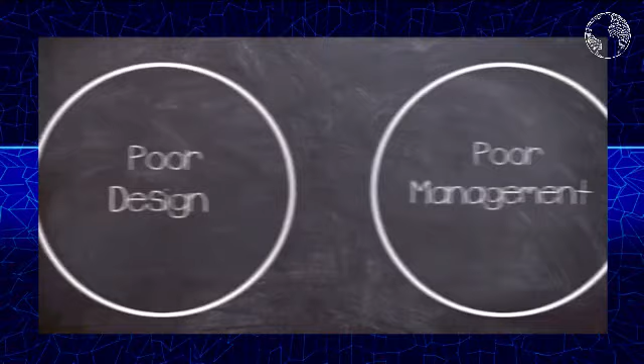most of Eastern Europe. Of course, today we're looking at the Chernobyl disaster of 1986, and this one has earned the magical 10 on my patented Plainly Difficult disaster scale.

Believe it or not, this video is actually part of a series of videos on the Chernobyl disaster and, in a wider context, the RBMK reactor type.

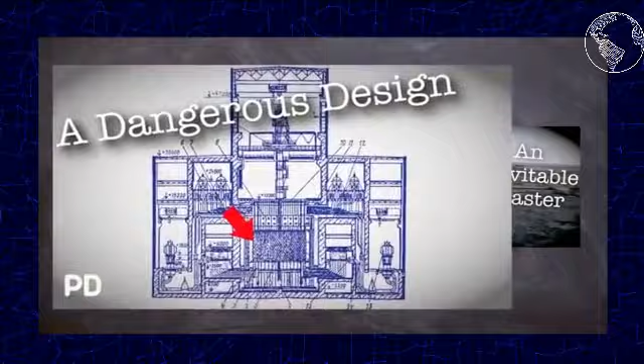Ah, you're back. Welcome. Yep, I know it was a bit of an overdone trope.

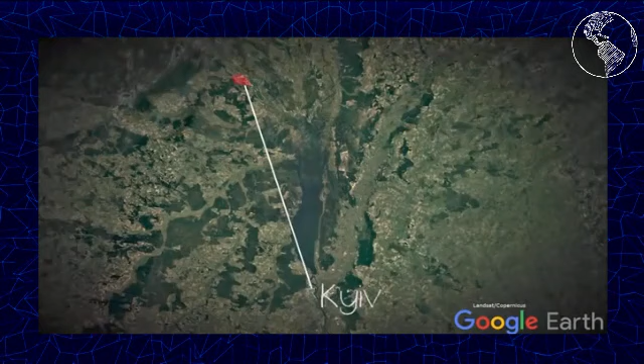So let's get back to the main reason why you're here. Our story starts back in 1970 in Ukraine, about 100 kilometres, 62 miles from Kiev, when ground was broken for a new city that would become known as Pripyat, an Atomgrad designed to house the workers for

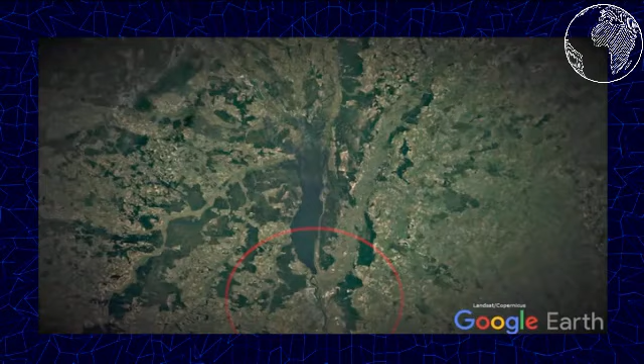a new nuclear plant. It should be said that the original plans were to build the city and the plant just 25 kilometres, or 16 miles, from Kiev, but it was thought to be too close to a major city, which turned out to be a good decision.

The concept of an Atomgrad is similar to, say, Tomsk, which were closed cities, although Pripyat was open later on in its short lifetime as a city. These municipalities were designed to be self-contained communities that had a sole purpose, and that was keeping the power plant

working and, by extension, the workers that were employed there happy. The community at Pripyat was developed to be the perfect home for a young family, with its amusement park and modern, at the time, architecture. In the same year, the ground where the new plant would exist was prepared for construction.

The Chernobyl nuclear power plant began construction proper in 1972 after the central government decided on what type of reactors the site would house. Originally, the idea for a pressurised water reactor was thought to suit the new plant, but

it was overruled by Anatoly Alexandrov, the chief scientist who was at the time supervisor of the project of RBMK reactor plants. The reactor type was preferred due to the design being cheaper to produce, and

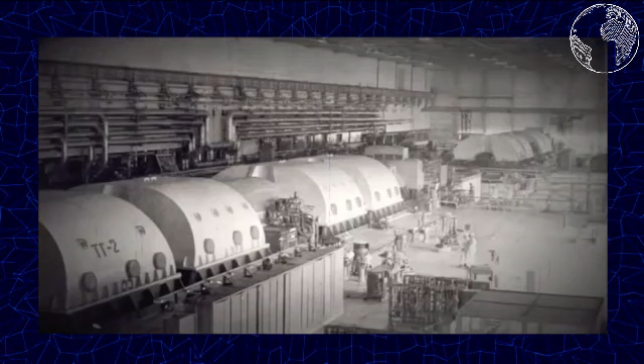as we found out with Leningrad, that cost was a pretty high priority, some might say even over safety. The nuclear power plant had the first of its 4 reactors ready to operate in 1977, followed by number 2 in 1978. As a quick side note, units 1 and 2 were the first generation RBMK 1000 reactors, and because

of this they had slightly different core loadings and containment structures. But the remaining 2 reactors at Chernobyl were of a slightly more modern second generation, and they were named units 3 and 4, which went online in 1981 and 1983 respectively.

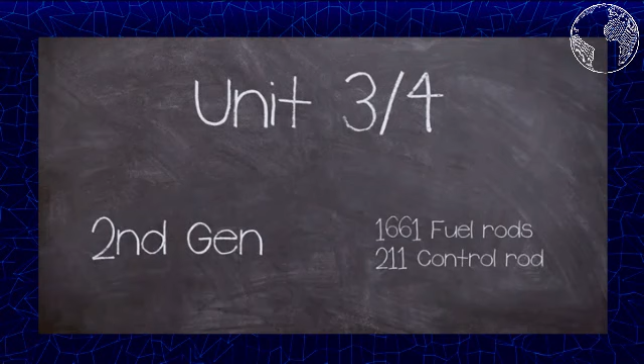There were plans for another 2 units, but these were abandoned after 1988 when risks of contamination left the project untenable. The nameplate capacity of Chernobyl nuclear power plant was Unit 1 at 800 megawatts of electricity, Unit 2 at

1000 megawatts of electricity, Unit 3 also had 1000 megawatts of electricity, and the same with Unit 4. In this video, I'll be focusing on the second generation RBMK, its design, and more specifically Unit 4.

But I did look into the first generation in the Leningrad video. The RBMK was a bit of a unique design in the reactor world, but it was a product of evolution rather than revolution, in that it used graphite to moderate the chain reaction with light water as a coolant.

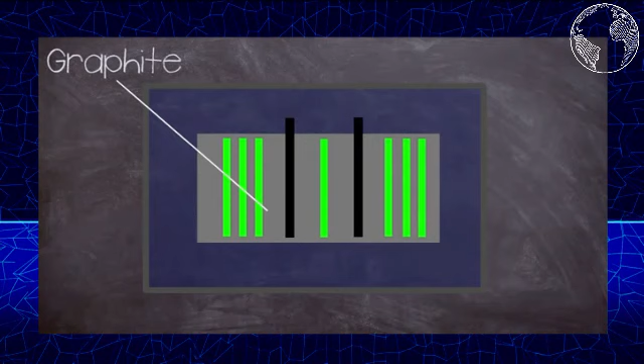This combination allowed it to use lower enrichment uranium-235 for fuel, which is not surprisingly significantly cheaper than other reactor designs. The RBMK had a very large core region consisting of a height of 7 metres and a diameter of

11.8 metres, which was mounted in a steel cylinder that was placed on top of a biological shield. The steel cylinder was 16 millimetres thick and had a diameter of 14.52 metres by a height of 9.75 metres,

dug into the floor of the reactor building, inside a reinforced concrete lined pit. Between the steel wall and the concrete lining, a water tank was placed, followed by a sand packing.

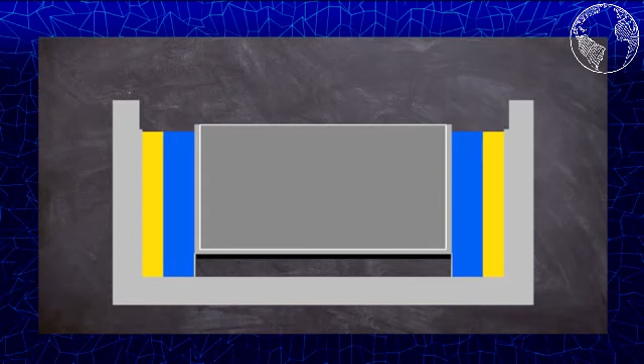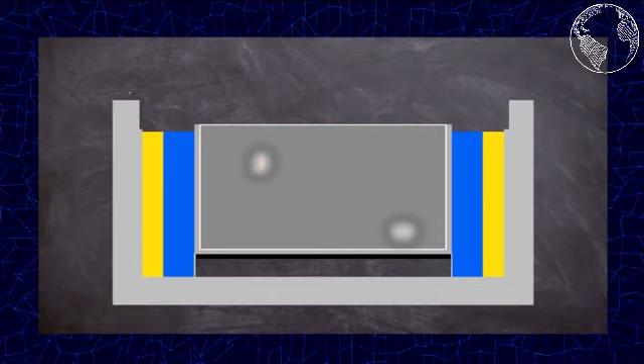Below the bottom biological shield, there were several basements used for pipework for the reactor core cooling loops. The core consisted of graphite blocks sized 25 by 25 centimeters, stacked up with holes drilled through the center for fuel and control channels. The size of the core could cause issues in reactivity control during operation, but we will talk about that a bit later on.

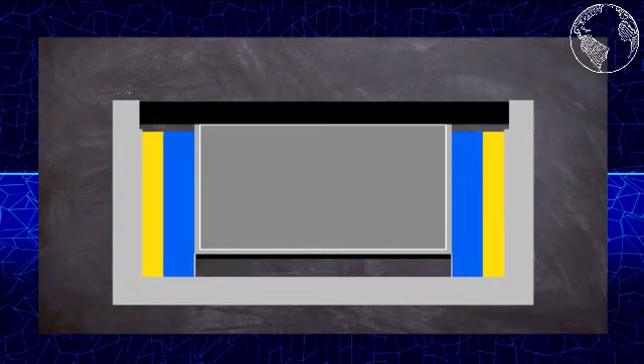On top of the core, another biological shield was placed with a steel cover on top of it, which formed the floor of the reactor hall. The cover plate was capable of withstanding a pressure build-up resulting from steam released by two simultaneous channel ruptures. All of this allowed the design to be refueled whilst in operation, which again helped with costs by reducing downtime.

As a side effect of this, the confinement structure of RBMK reactors is less than ideal, as the tall refueling machine had to be housed inside the reactor hall. Because of the large floor space and subsequent roof requirements, the vast quantities of heavy concrete wouldn't have been architecturally, or more importantly, financially viable.

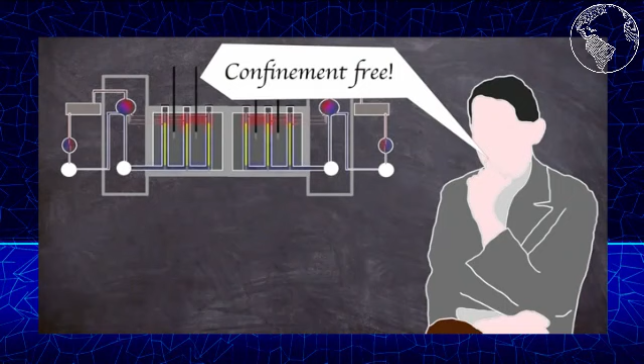The RBMK didn't have a prototype and was instead put straight into production, with the first reactor being installed in Leningrad in 1970. The original designs omitted confinement, instead claiming that the fuel being in its own channel with flowing cooling water was an acceptable alternative. The main takeaway from this is confinement was poor, resulting in disastrous results in the case of fission product release.

The coolant was pumped through the core, from the bottom common header through high pressure tubes that jacketed the fuel elements, where the water would boil. Coolant water also circulated in the control rod channels. The primary cooling of the reactor was via two separate cooling circuits, one for each half of the core, meaning everything was doubled up, leading to four main circulating pumps, which were 3 operating and 1 standby per loop.

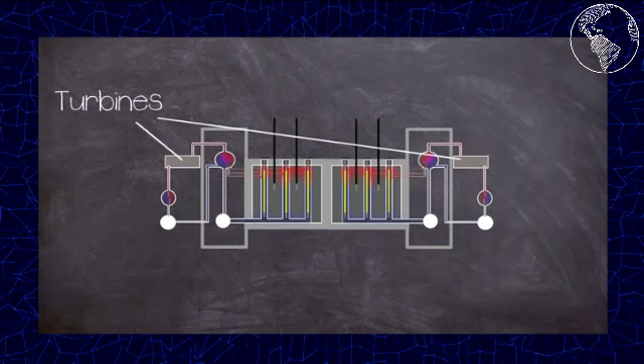As the coolant boils, it exits the top of the core and is passed through a water steam separator, which takes the steam to high then low pressure turbines which generate the electricity. The steam is then passed through a condenser that turns it back into water to be pumped back into the core, completing the primary cooling circuit. The condenser is cooled by using a separate secondary water cooling circuit, meaning the primary cooling circuit is self-contained.

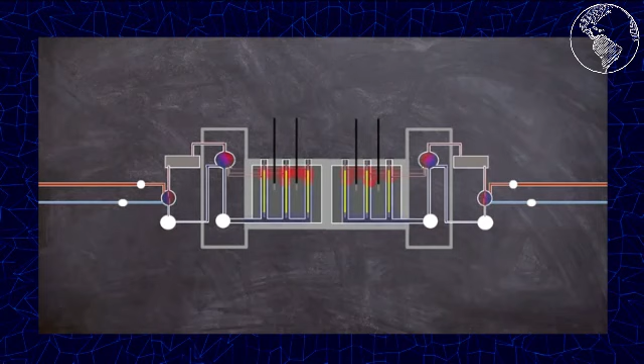As mentioned before, the reactor employed graphite blocks for its moderator. A moderator is used to reduce the speed of fast neutrons released from fission, so they can better facilitate a chain reaction, getting more use out of the fuel. Ideally, moderators work without capturing any neutrons, leaving them as thermal neutrons. But where the design has its potential flaw is having a separate coolant that can also absorb neutrons, which can make the reactor unstable in certain situations.

This brings up the big elephant in the room, and that is void coefficient. It wasn't just the graphite that had moderation characteristics, but the coolant water as well, because H2O naturally slows down and absorbs neutrons. This brings a problem for the reactor, as with the increase in temperature from fission, the coolant boils off into steam, known as voids, i.e. a bubble that does not absorb neutrons. With the steam not absorbing neutrons, this leads to an increase in the power of the reactor.

The RBMK did not rely solely on its coolant for moderation, because that's what the graphite was for, but the water did absorb neutrons, meaning that as it boiled off, the operators had to compensate for this with the control system. If not properly managed, a runaway incident can happen as the coolant heats up, increasing reactivity, heating up the coolant more, creating more steam, leading to greater reactivity. This is called a feedback loop. During this reactor state, more and more neutrons are produced and their density grows exponentially fast, creating a positive void coefficient. The risks of a feedback loop were greater at certain power levels, but this will be covered later on.

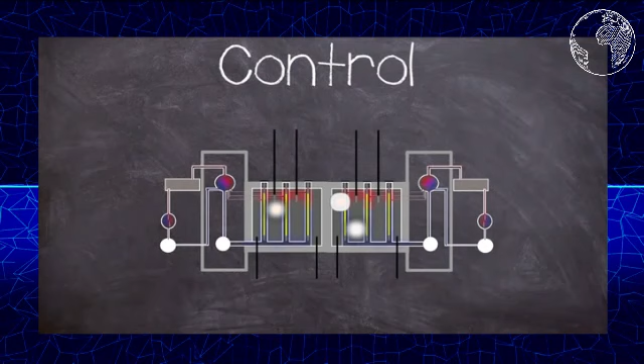Now this leads us quite neatly onto reactor control. As I said before, the core region was rather big, and this meant that the RBMK was kind of like multiple smaller reactors in that hotspots could occur which needed to be individually managed.

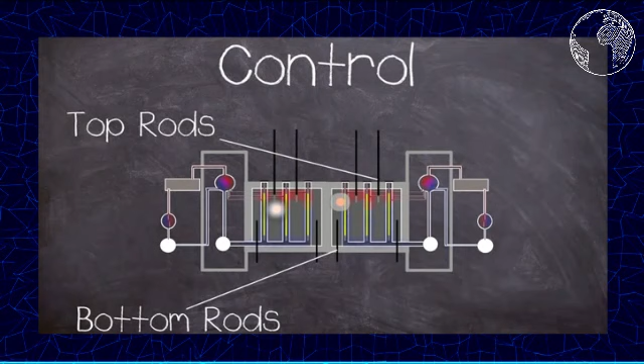And this leads on to the strange design choice for both top-loaded and bottom-loaded control rods. There were 167 top-loaded rods and 32 shortened rods loaded via the bottom, and another 12 automatic controls inserted from the top. The shortened rods were used to manage axial power distribution, which was necessary due to the core size, to manage hotspots.

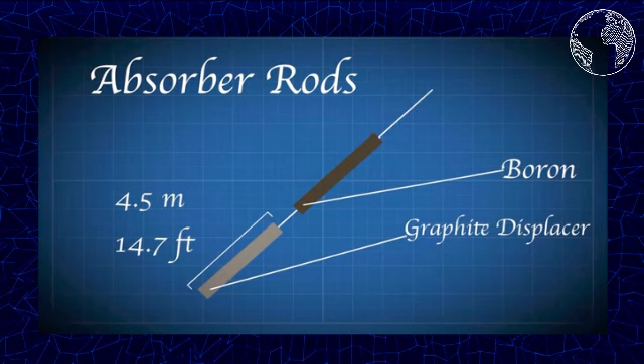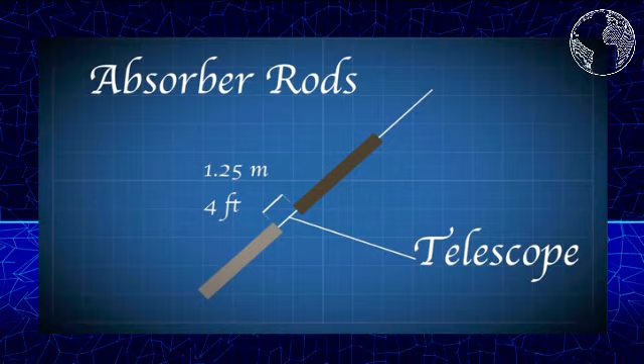The main control rods had a 4.5 metre long graphite rod termed a displacer attached to the end of the length of the control rods, except for the 12 rods used in automatic control. The displacer connected to its rod via a telescope, with a water-filled space of 1.25 metres separating the displacer and absorbing rod.

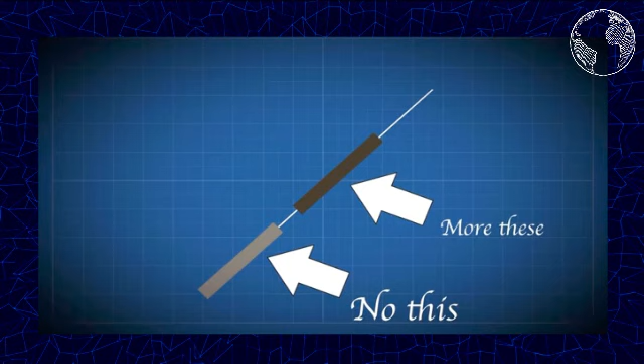This was to stop water filling the space left behind by the control rod after it left the core region, which would parasitically absorb neutrons. Removing one neutron absorber, a boron control rod, to be replaced by another weaker absorber in the form of H2O, kind of defeats the point of a control rod. Thus, without a displacer, more control rods would be needed, as each would have less effect on the reactivity of the core.

The dimensions of the rod and displacer were such that, when the control rod was fully extracted, the displacer sat centrally within the fueled region of the core, with 1.25 metres of water at either end.

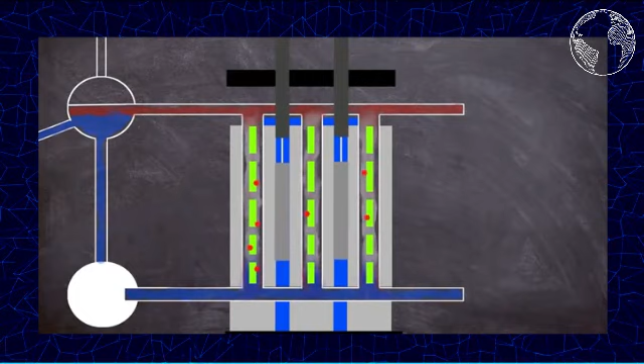But this setup, in certain situations, could cause a positive scram effect. On receipt of a scram signal causing a fully withdrawn rod to fall, water was displaced from the lower part of the channel as the rod moved downwards. This caused a localised insertion of positive reactivity in the lower part of the core.

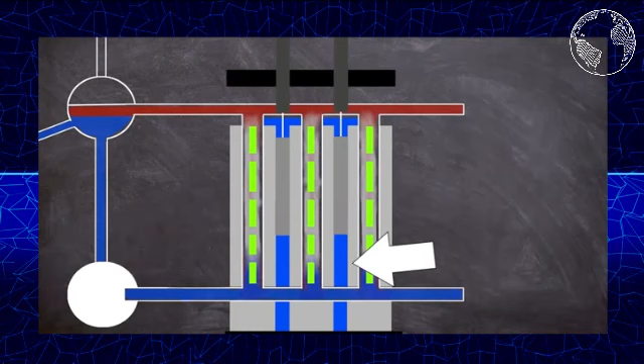This was because the RBMK had a high moderator to fuel ratio, meaning the lower part of the core would experience a spike in reactivity as the graphite displacer entered it, replacing the neutron absorbing water with neutron moderating graphite. But this situation was only dangerous at certain power levels of the reactor, which was meant to be mitigated by the knowledge and training of the operators, and also importantly by their management.

Part of this mitigation was by having an operating reactivity margin. The ORM is the number of equivalent control rods of nominal worth remaining in the core.

The total time required for a scram, or insertion of the emergency control rods into the core, when starting from the upper limit stop switches, was around 18 seconds, which was relatively slow. But this was due to the size of the control rod channels and the fact that the coolant had to be pushed out of the way.

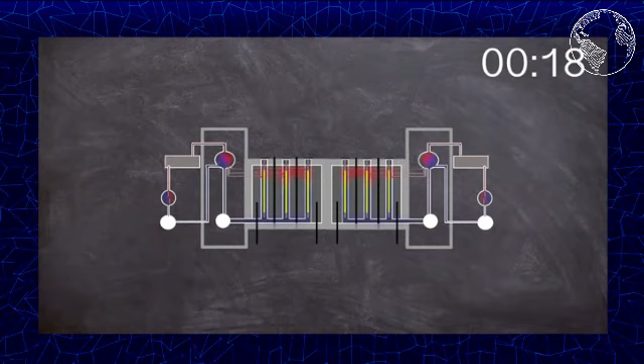The scram could be initiated by the control system or manually via the AZ5 button. The control system employed on the RBMK 1000 utilised ionising chambers and various sensors both inside the core and outside, which were effective from power levels above 10% of total power.

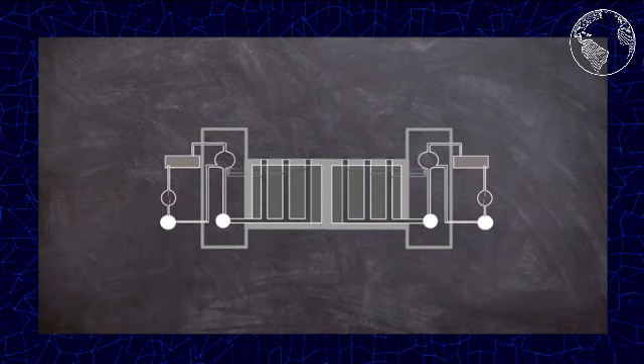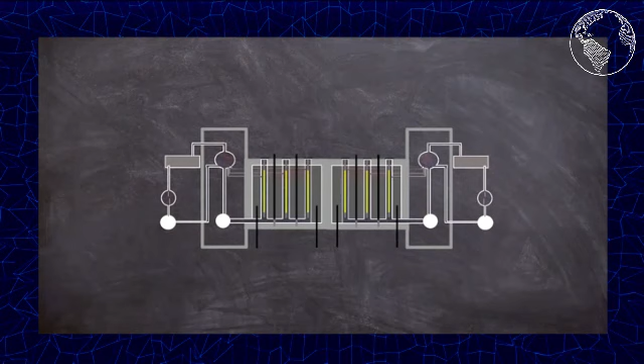The external detectors were all mounted mid-level of the core, meaning no low axial power monitoring could be undertaken. This meant that low power operation below 10% had to be done by operators relying on experience and feel rather than monitoring the equipment. But manual low power control was only really intended for a cold startup, so to speak, when the reactor was free of the neutron absorbing poison xenon-135.

I need to mention neutron poison, as it will play a vital part later on, and was also a contributory factor in another RBMK incident, the meltdown in Leningrad in 1975.

During fission, some products are given off, one of which is xenon-135, which has a high neutron absorption rate. This is okay when the reactor is in a steady state, as it burns off this undesired byproduct, since poison burning is proportional to reactor power.

But when the power of the reactor is decreased, the xenon-135 is not burned off and can shut down the chain reaction by absorbing too many neutrons. This is known as an iodine pit.

All is not lost, as xenon-135 has a relatively short half-life of around 9.2 hours, so a reactor core is considered poison-free after several half-lives have passed.

But this is not good from an economic standpoint, as the unit would be shut down for a few days, which is where good management is meant to come into effect, where safety is prioritised over money. But in the former USSR, taking a reactor out of action for a few days could have a detrimental effect on one's career longevity. Our story starts with an issue inherent to all reactors of any type, a thing called decay heat.

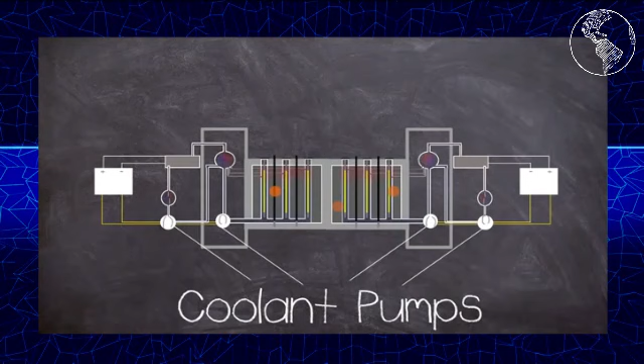And when the reaction stops, this continues, at least for a while after shutdown. During power operation, this is fine as electricity is being produced, but after shutdown, the pumps need to keep circulating to remove the decay heat. Usually the electricity needed for the pumps can be drawn from the national grid. But what about if there is a full power outage? Then backup is needed. This presents a problem.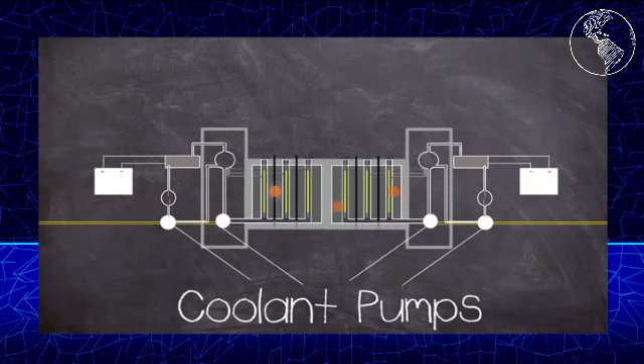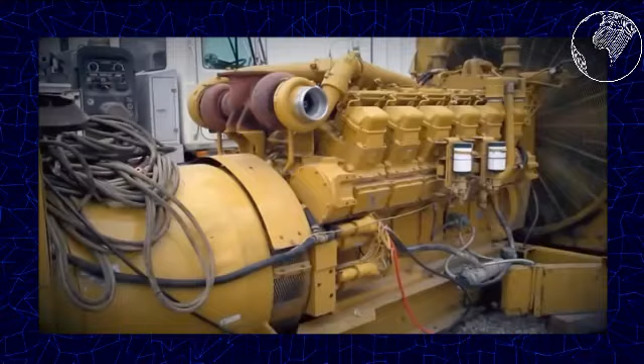If for any reason, being scheduled or not, a reactor is shut down and there is a power cut, how will the pumps keep working? Well, the solution is pretty simple, and that is a diesel backup generator. Each of Chernobyl's reactors had 3 backup diesel generators, which took in excess of 70 seconds to reach full power. Too much time in the event of a full power cut.

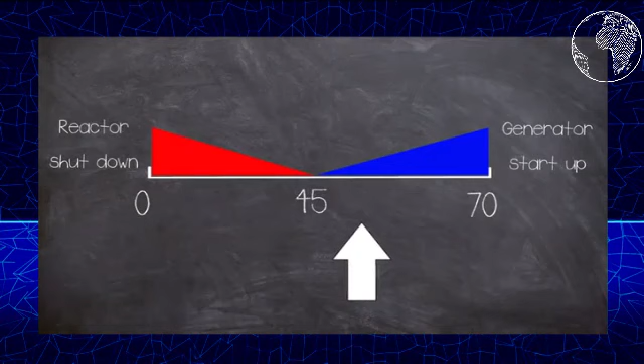In theory, some of this time could be covered by the spool down of the turbo generators, which was theorised to cover around 45 seconds. Not the full time needed, but possibly enough to prevent fuel melting.

To prove that this could work, it had to be tested out, and in 1982, 1984 and 1985 this was attempted, but all tests failed to produce the electricity needed to run the pumps. The test was to be conducted again in April 1986.

Strangely, the test procedure that was written hadn't taken into account the eccentricities of the RBMK reactor, especially at low power outputs. The test was to be conducted during a routine shutdown. For the test to go ahead, some vital systems had to be switched off, most notably the active-passive emergency cooling system used in a loss of coolant accident. This required the chief engineer to sign it off.

In preparation for the test, the following had to be set up. The reactor power was to be reduced to between 700 and 1000 megawatts of thermal energy, and the steam turbine generator was to be at normal operating speed.

After all this was sorted, the preparations for the electrical test could go ahead. The steam supply to the turbine generator would be closed off. The turbine generator performance would then be monitored to see if it could bridge the power for coolant pumps until the emergency diesel generators took over.

When the emergency generators supply electrical power, the turbine generator will be allowed to continue freewheeling down. The normal planned shutdown procedure of the reactor was then to be completed.

The date of the test was to be the 25th of April 1986, 15 minutes past 2 p.m, completed by the day shift. As such, the operators were briefed on the procedure and a team of electrical engineers was present.

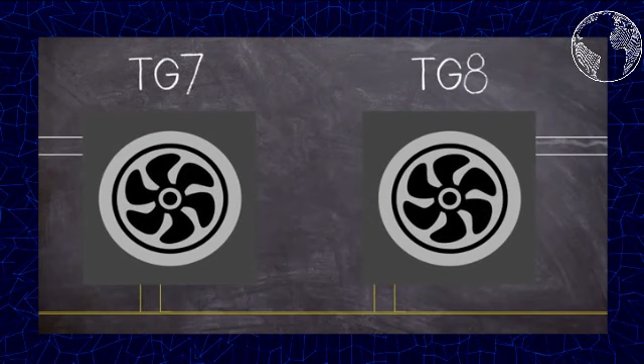At around 1 a.m. on the 25th of April, the reactor was gradually powered down to around 50%, in time for the day shift. At 1:05 p.m, the turbo generator TG7 was switched off. The 4 main circulating pumps, 2 electrical feed water pumps and other electrical equipment that was connected with this turbo generator were switched over to bus bars for the turbo generator TG8.

The ECCS was disabled with the correct authorization from the chief engineer, but just after 2 p.m, the Kiev electrical controller asked for the test to be postponed to cover the evening electrical peak demand. The request was due to another power station in the region unexpectedly going offline. Chernobyl's director agreed and the test was pushed back, but the ECCS was not reinstated.

The status of the ECCS showed the lack of safety culture at the plant. Although the system wouldn't really be a factor in a disaster, it highlights the management culture at the time.

The day shift soon gave way to the evening shift, which in turn was soon to be replaced by the night shift. To oversee the test, Anatoly Dyatlov, Deputy Chief Engineer, took the helm in the control room. Due to his seniority, he outranked all operational staff on shift at the time.

Alexander Akimov was the chief of the night shift, and Leonid Toptunov was the operator responsible for the reactor's operational regimen and the movement of the control rods. At around 2300 hours, the Kiev electrical controller allowed the continuation of the reactor's shutdown, and by 10 past 2300 hours, the reactor power was brought down to 700 megawatts of thermal energy.

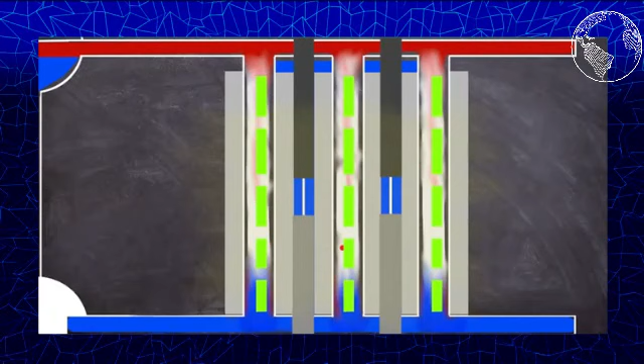The night shift operators had to prepare for the test in a short period of time. In theory, after the test was completed, the team would have a straightforward night, just monitoring the decay heat until the next crew changeover. As the power dropped off, the high amounts of iodine-135 decayed into the poison xenon-135 as it was not being burned off quick enough.

This reduced the power of the reactor without any operator intervention to 500 megawatts of thermal energy, at which point manual intervention was started in order to maintain the level.

At 28 minutes past 12 on the 26th of April, the reactor power had dropped to just 30 megawatts of thermal energy, with a near shutdown-like state. It is not 100% known why, but both equipment failure and operator error have been attributed to the reactor state.

As set out in the operating instructions, the reactor should have been powered down to wait for the xenon-135 to decay, but shutting down the reactor without doing the test wouldn't have made many friends in management. To increase the power, the control rods began to be removed to try and overcome the poisoning of the core, reduced coolant void and graphite cooldown.

In the attempts to raise the power, the operational reactivity margin was violated by removing more of the absorbing control rods, and by 1 AM around 200 megawatts of thermal energy was reached. The reactor was now in a dangerous state.

Not wanting to leave empty-handed, Dyatlov insisted that the test be conducted at the current power level. In reality, the core was heavily poisoned and was in a dangerous state with very few absorbing rods for emergency control. During the preparations of the test, the operators powered up the 2 backup coolant pumps, leading to all 8 working.

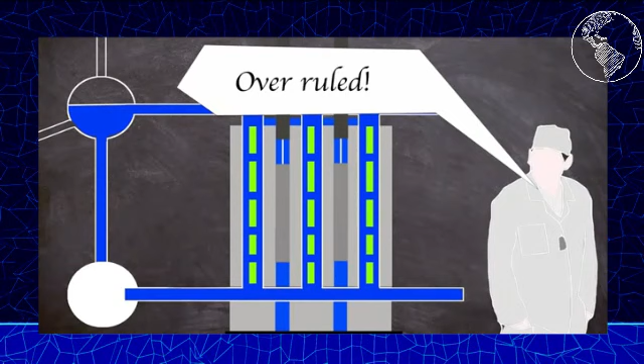The increase in water flow reduced the voids within the core, which would have set off an automatic scram, but this was bypassed by the operators. As the coolant absorbed the neutrons in the core, only 8 control rods were left as a safety margin. The minimum that the ORM stipulated was that around 28 rods should have been in the core.

The reactor started to experience a feedback loop. With not many rods in the core to manage the power, the situation was that the water in the reactor found itself being the main neutron absorber, and disaster was just waiting to happen.

At 1:23 in the morning, the actual test had now begun. The command was given, the stop valves for turbine number 8 closed and the rundown operation started. As the turbines spooled down, the power to the feed water pumps slowed, increasing the temperature of the coolant, creating more voids. With less water absorbing neutrons, the power of the reactor began to rise.

A feedback loop was beginning to start in the lower part of the reactor core. The operators pressed the AZ5 button in response to the worrying increase in power, and the control rods started their travel into the reactor core.

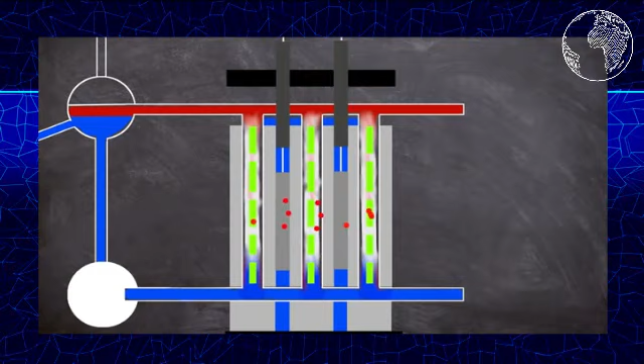As the control rod attached graphite displacers moved down to the lower part of the core in their control channels, the neutron absorbing water was pushed out of the way, creating a momentary spike in power, replacing it with neutron moderating graphite. During the spike, some of the fuel rods ruptured, blocking the control rod columns, stopping the control rods at 1/3 insertion.

This left the graphite water displacers stuck in the lower part of the core, increasing the runaway power excursion. Within 3 seconds, the reactor power rose to 530 megawatts of thermal energy. In the control room, a few shocks were felt, and the control rod indicators showed that the insertion had stopped.

As the channel pipes began to rupture, mass steam generation occurred as a result of depressurization of the reactor cooling circuit. Fission materials leaked into the coolant, and steam pressure grew inside the core as the coolant boiled off, creating a greater neutron population. The reactor power hit 30,000 megawatts of thermal energy, although it is thought that the power could have gone much higher than that during the excursion.

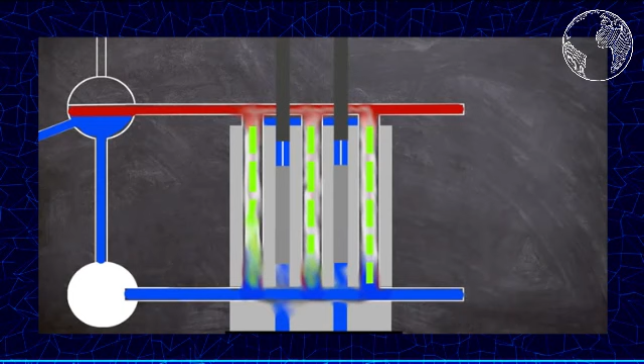The steam blew off the top steel cover and top biological shield of the reactor as more than the 2 designed fuel channels failed, releasing debris into the reactor building. This was what would later be described as the first explosion, but it would not be the last.

A second, more powerful explosion occurred between 2 and 3 seconds later, and this destroyed the roof and ejected superheated pieces of graphite out of the reactor hull, peppering the area around the building with shrapnel. Some red-hot material fell onto the roof of the machine hall and started a fire. It is thought that around 25% of the core material was ejected.

The now uncovered reactor core mixed with the outside air and ignited a graphite fire. A blue glow could be seen outside the reactor building from ionizing radiation emitting from Unit 4. There was nothing left of the reactor confinement structure, which meant little stopped the harmful contamination from escaping.

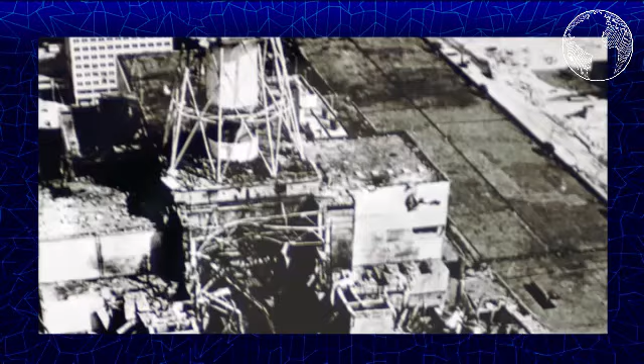Some of the debris that was ejected started a fire on the roof of Reactor 3's building, but insanely the unit wasn't shut down straight away. Instead, the operators were told to take iodine tablets and don respirators.

At 1:45 in the morning, the first responders from the Chernobyl fire team arrived under the command of Lieutenant Vladimir Pravik and began trying to extinguish the flames on Unit 3's roof. All around them lay pieces of Unit 4's graphite core. The firefighters were only aware of the fire, and because of this they didn't have any radiological protective clothing on.

As they worked, they breathed in some of the fission material in the form of dust and were exposed to deadly radiation. Many would come down with acute radiation sickness shortly after. Some of the first responders felt a metallic taste in their mouths, similar to what others had reported post-exposure, for example from the victim of the Wood River Junction criticality.

The fires on the roofs of Units 3 and 4 were under control between 2:10 and 2:20 in the morning, and the fire was fully put out at 5 o'clock in the morning. However, the graphite fire in what was once Unit 4 continued to burn, expelling its radioactive plume of dust, steam and smoke into the atmosphere.

The operators started to pump water into the core, but this did little to bring the situation under control. The estimated dose of 5 to 6 Röntgens per second was experienced around some parts of the reactor building, which is equivalent to more than 20,000 Röntgens per hour, enough to give you a lethal dose in minutes.

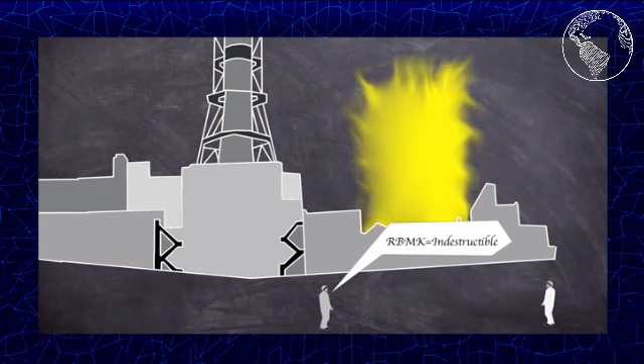Crew Chief Alexander Akimov stayed in the building until the morning, ordering staff to try and pump water into the core. Many of these workers would be dead within a few weeks. The RBMK core was generally thought by staff to be incapable of becoming uncovered, and as such, the blatant evidence to the contrary was ignored.

At 2 p.m. on the 27th of April, an announcement that you would never want to hear was broadcast in the city of Pripyat: 'For the attention of the residents of Pripyat, the city council informs you that due to the accident at the Chernobyl power station, the radioactive conditions in the vicinity are deteriorating. The Communist Party, its officials and the armed forces are taking necessary steps to combat this. Nevertheless, with a view to keep people safe and as healthy as possible, the children being top priority, we need to temporarily evacuate the citizens to the nearest towns of the Kiev region.'

For those reasons, starting from the 27th of April 1986 at 2 p.m., each apartment block would have a bus at its disposal, supervised by police and city officials. The first to leave the town were women and children, and within 3 hours the city was empty, a ghost town, left to decay. But this will be the subject of another video.

Emergency accident management operations began on the 28th of April. The first priority was to tackle the radioactive material release, starting with attempts to put out the graphite fire. Multiple items were dropped into the core, each intended to tackle a different part of the fire and the radioactive release. First, the radiological side was tackled by dumping a total of 5,000 tonnes of material.

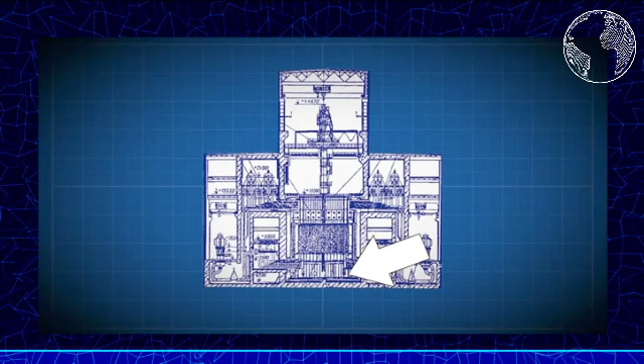The firefighting efforts and pumping of coolant water left the basement flooded, which caused another potential disastrous outcome: another steam explosion. You see, the fuel from the core was melting towards the basement, which had flooded. But below that was more water from the bubbler pools, which was a large water reservoir for the emergency cooling pumps and as a pressure suppression system.

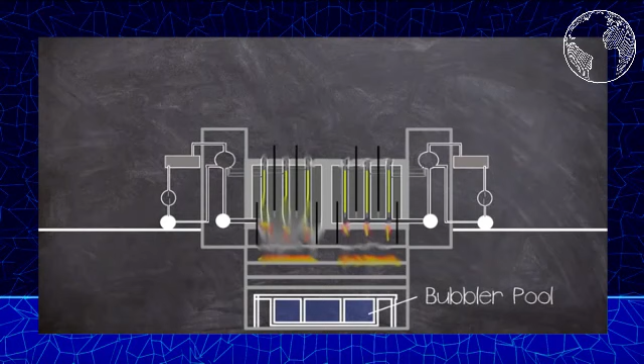Needless to say, this was the next point of focus for the accident management team. Engineers Alexei Ananenko and Valery Bezpalov and supervisor Boris Baranov volunteered to empty the bubbler pools. This was done by valves controlling sluice gates, which were housed in a room that had now become flooded. All three men donned protective suits and breathing equipment and made their way down the corridor.

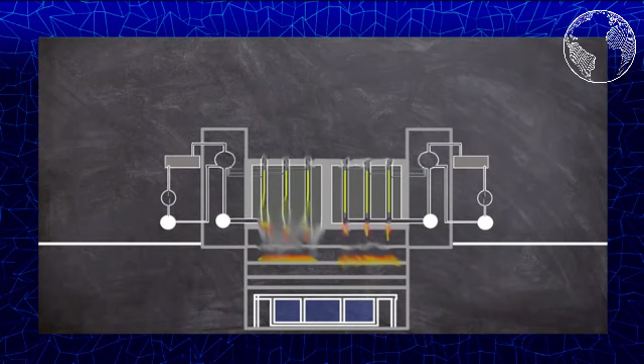The men were successful and the bubbler pools began to empty. Surprisingly, all three survived not only the day but continued to live long after the disaster, averting the immediate steam explosion. But that wasn't the end to the worry of a deadly explosion.

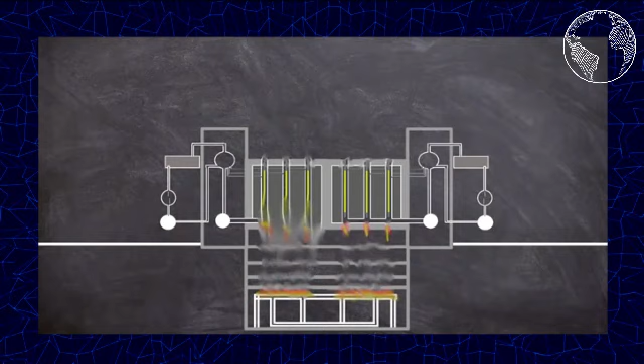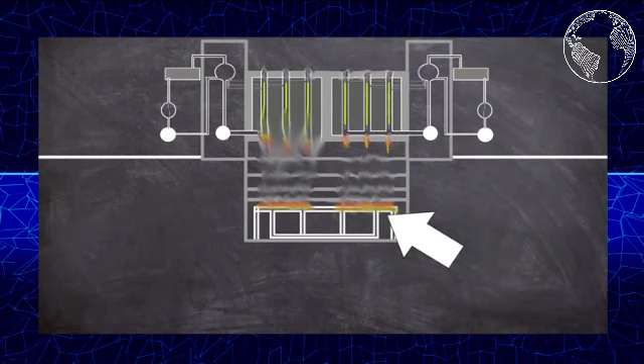As described in the film China Syndrome, the core could continue to melt through the floor of the containment and into the earth, eventually hitting the water table, meaning another steam explosion. The next focus of the accident management team was stopping the molten core from escaping the bottom of the reactor basement. A design that was thought up by physicist Leonid Bolshov involved digging out a cavity below the reactor building basement.

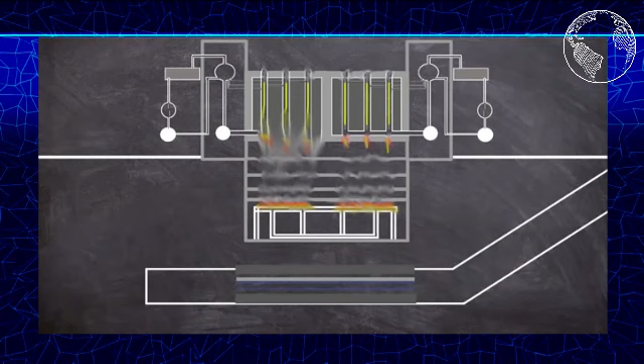The concept used a coiled formation of pipes cooled with water and covered on top with a thermally conductive graphite layer. The graphite cooling plate was to be encapsulated between two sacrificial concrete layers, each one metre thick. In theory, as the molten uranium oxide hit the graphite, it was to rapidly cool down, catching the core meltdown.

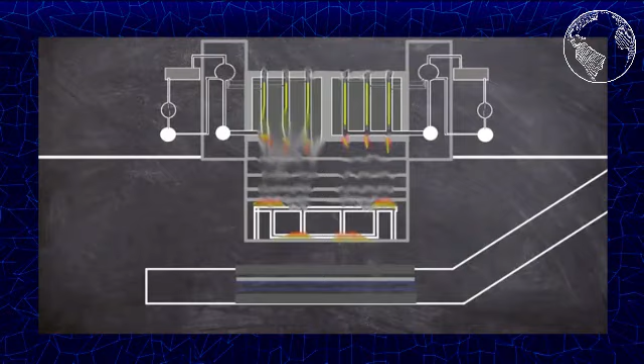Thankfully, the theory didn't have to be put into practice, as the core had finally come to rest in one of the lower basements of the reactor building, part of which formed the famous Elephant's Foot, which was discovered in December 1986, with a radioactivity of 8,000 röntgens, or 80 grays per hour. For reference, a whole body dose of around 5 grays can be lethal.

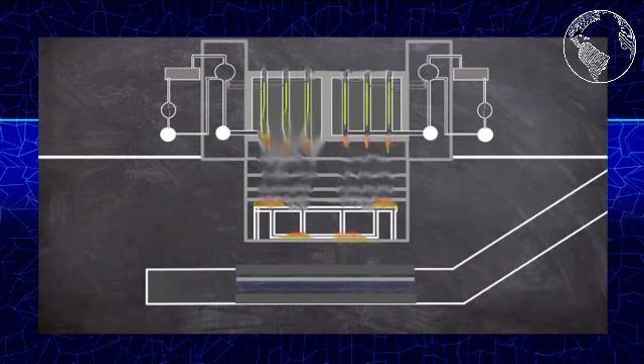The molten material is known as corium and is a mixture of the material found inside the core, mainly made up of silicon dioxide with traces of uranium, graphite, zirconium and titanium. The excavated cavity and cooling system, now unneeded, was filled with concrete to help the structural integrity of the heavily damaged reactor building.

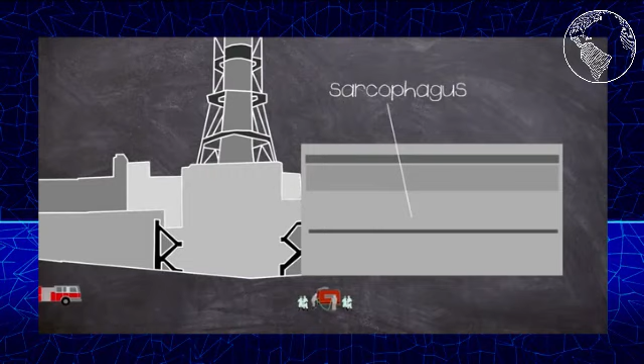A plan was conceived to contain the contamination release of Unit 4 in the form of a concrete lid, which would come to be known as the sarcophagus. Construction began in May 1986, 24 days after the disaster, to encapsulate some 200 tons of radioactive corium, 30 tons of highly contaminated dust, and 16 tons of uranium and plutonium. The construction would last for 206 days, between June and late November of the same year.

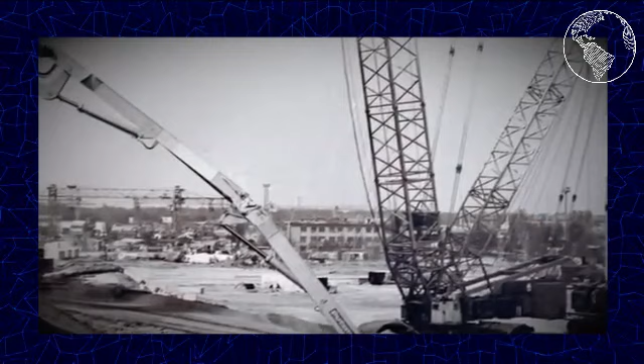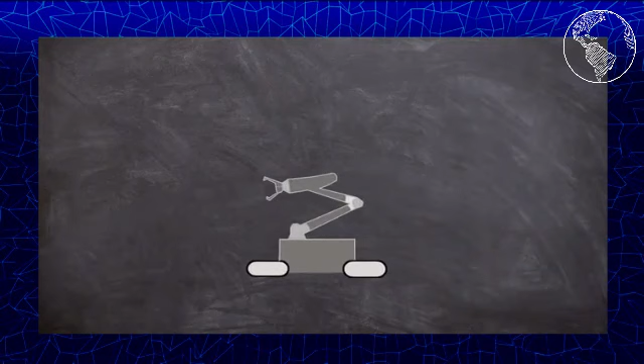But before the core could be enclosed under the sarcophagus, the next phase of remediation was to remove all the core material that scattered the area, and one of the most dangerous places was the roofs of the buildings surrounding Unit 4. Initially, robots were thought to be able to undertake the clearing works, but due to radiation interference, only around 10% of the debris could be recovered.

This necessitated the use of good old-fashioned people. The most basic of equipment was needed for the task, which included protective clothing and a shovel. A total of 5,000 people, known as liquidators, were called upon to undertake the cleanup on the roof, each only being allowed between 45 to 90 seconds of total working time to reduce the risk of exposure. The calculated risk was 25 rem, or 250 millisieverts, of radiation per person.

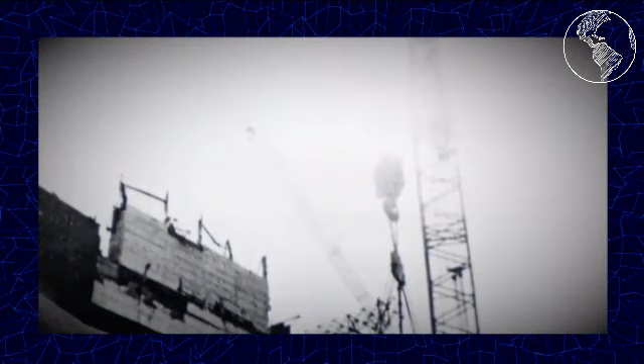There were many more liquidators also used for other clearing up works in the wider area. And finally, after this, the sarcophagus could be closed over the turbine hall and reactor building. The construction was undertaken over 8 stages, all whilst Unit 4 released contamination, and next to it, Unit 3 still needed to be operable. Concrete containment walls were built around Unit 4, and a dividing wall was erected between it and Unit 3. The sarcophagus was placed on top of the concrete containment walls.

More than 400,000 cubic metres of concrete and 7,300 tonnes of metal were used during the construction of the sarcophagus. The building encapsulated an estimated 740,000 cubic metres of heavily contaminated debris together with contaminated soil. Holes were installed in the structure to allow pressure release, albeit through a filtration system.

The shelf life of the structure was only thought to be around 20 to 30 years, necessitating a new containment structure, but this will probably be covered in the next video in this series.

So, with an official death toll of 31, a nuclear power plant essentially unusable, and many decades ahead of remediation works, how was Unit 4 allowed to be operated in such a dangerous state? Unsurprisingly, it comes down to management.

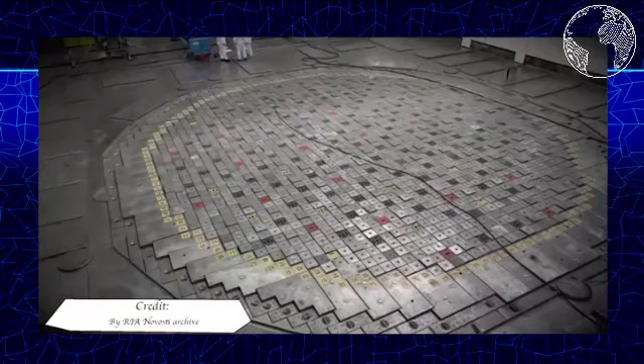The warning signs of the potential for fuel damage in an RBMK-1000 reactor reared their heads several times in the reactor type's history. A partial fuel melting in Leningrad over 10 years before, in 1975, had been covered up, and information was not passed on to other RBMK operational staff at different power plants. Again, the fuel melting incident that happened in 1982 at Chernobyl Unit 1, no less, was also covered up, this time by Viktor Brukhanov, meaning lessons again were not passed on.

The risks of a positive effect of scram causing a power spike were known in December 1983 at Ignalina Unit 1. Unlike other incidents involving RBMKs, the information from the event was passed on to other plants, but it was thought not to have been important enough to act on, as the control rods didn't get stuck and did continue to stop the reaction. The IAEA was involved in the investigation into the disaster using the International Nuclear Safety Advisory Group.

Which had been created by the IAEA in 1985. All of the reports have never been able to categorically say for 100% what the cause of the core uncovering was, and there is much speculation as to whether the power excursion happened pre or post scram. But operating the reactor in the state it was in meant that something was going to fail.

Regardless of the inherent flawed designs of the RBMK, it was operated way out of the agreed parameters, even those set by the lax Soviet nuclear industry. It can be attributed to the culture of working where failure was not accepted and vital operating incidents were not learned from. As well as this, the design flaws were outright covered up and held back from the operators.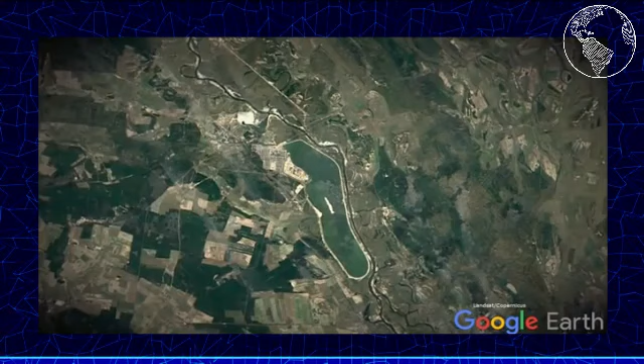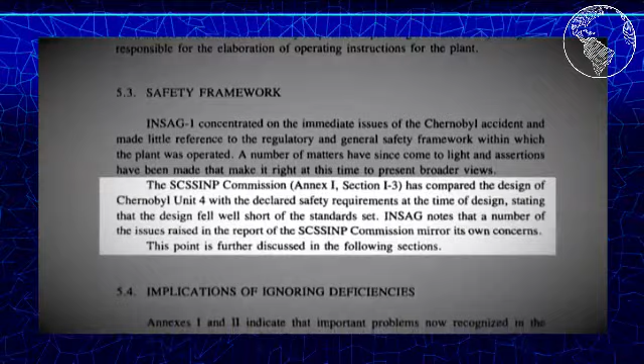This was all highlighted in the 1992 INSAG-7 report, which also said in its summary, the plant fell well short of the safety standards in effect when it was designed, and even incorporated unsafe features, compounded by inadequate and ineffective exchange of information between both operators and between operators and designers.

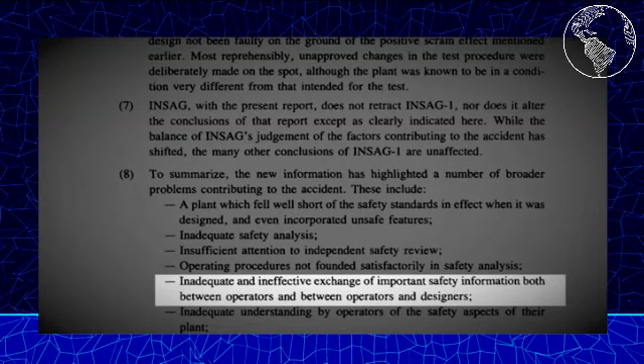There was an inadequate understanding by operators of the safety aspects of their plant, also affected by insufficient respect on the part of the operators for the formal requirements of operational and test procedures. The industry in the USSR had an insufficiently effective regulatory regime in place to counter pressures for production.

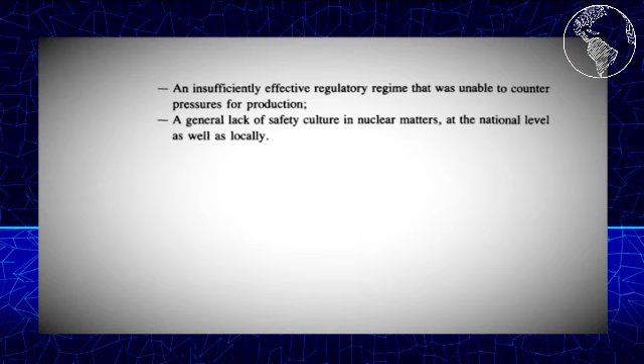The pressures from central government and lack of awareness of the design risks of the reactor meant that management acted dangerously in the false pretense that the RBMK was indestructible. Pretty much the entire management structure was throwing around a grenade that they didn't know had the pin pulled out of, meaning disaster was only a matter of time.